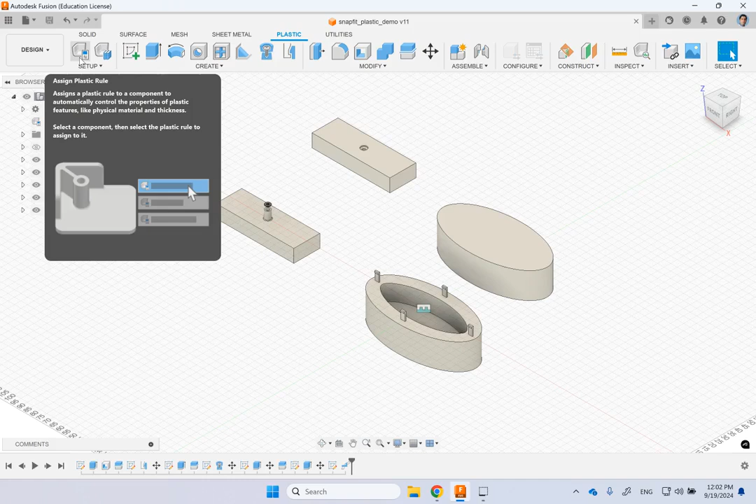This is really good for designing plastic parts like you are making them out of 3D printing. The first thing you want to set is which plastic this is from. You can say, for instance, when I want to make these parts, I want to make them out of ABS or nylon or PP or any other plastic. Let's say I want to make them out of ABS. In this design, it's already ABS, but if you want to do it from any other plastic, you can change it to nylon or anything.

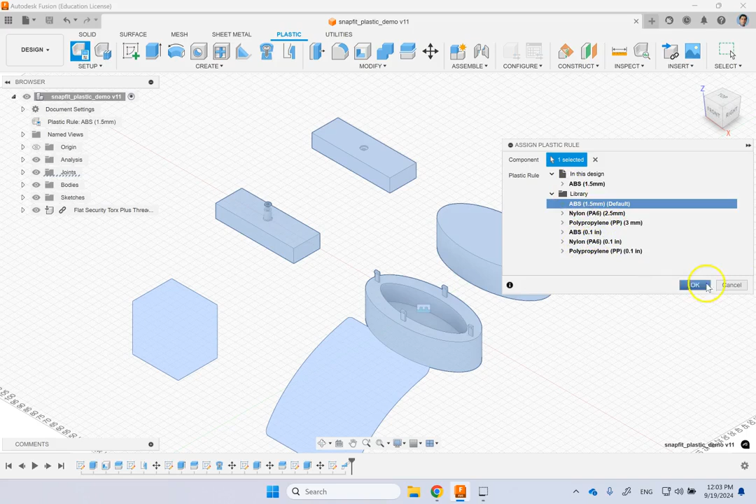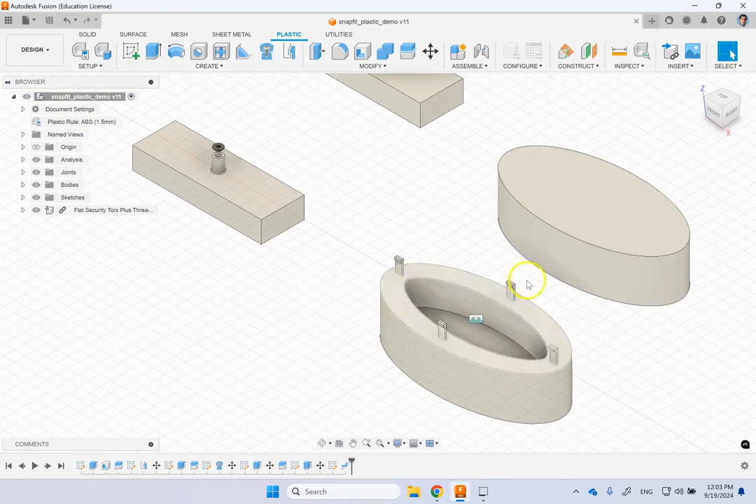Once the plastic rule is set and the plastic properties, you can go ahead and do these two options I want to explain to you. One of them is snaps, which are really good if you want to connect two parts together, these snap fits. So if you break your part into half, or you have the bottom part and the top part, left and right, then on one of them it's going to create basically these snaps, and on the other one it's going to create the snap holes.

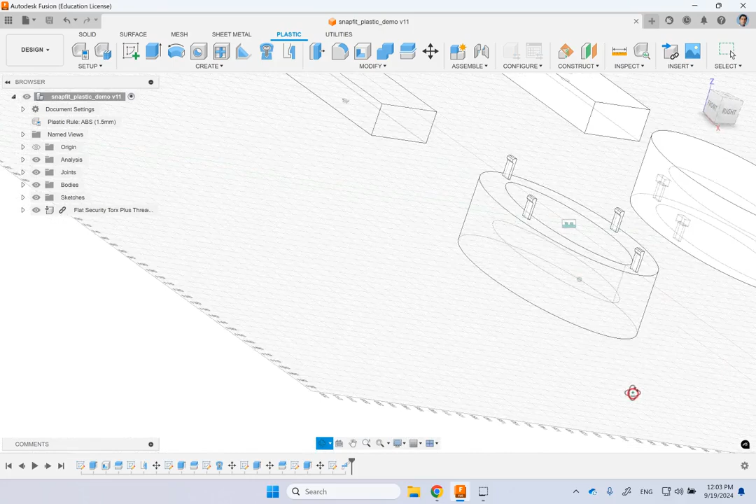Let me show you a wireframe that you can see better. So let's look here, you see these holes on these parts is where these snaps go and get locked. This is really good here, that you can create the snaps for these two parts to go together.

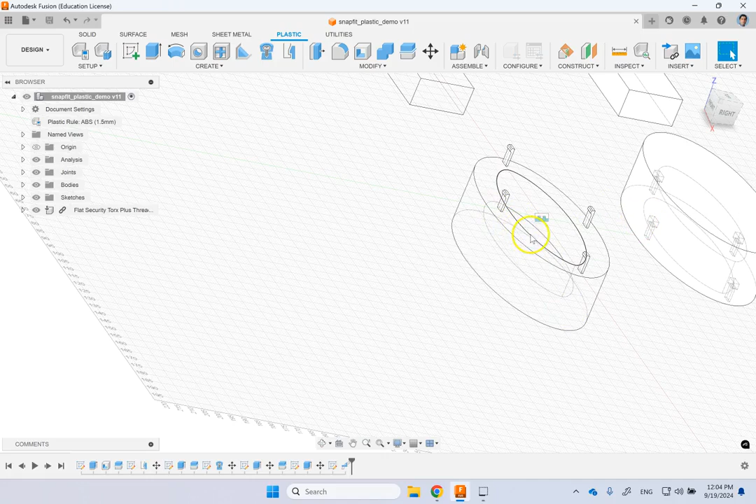Of course you have to have something for these snaps to be pushed back and get out, and that's not done right now, but you can add some holes for them so you can release those snaps back if you want to open the parts, because you don't want to break them. So that's one thing I want to show you.

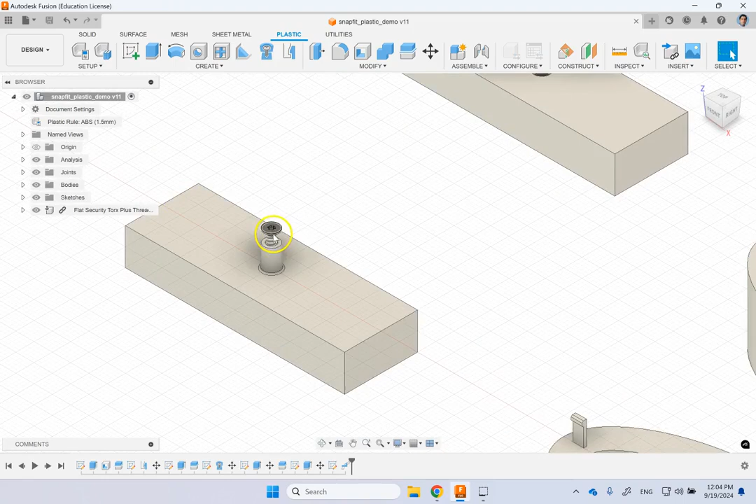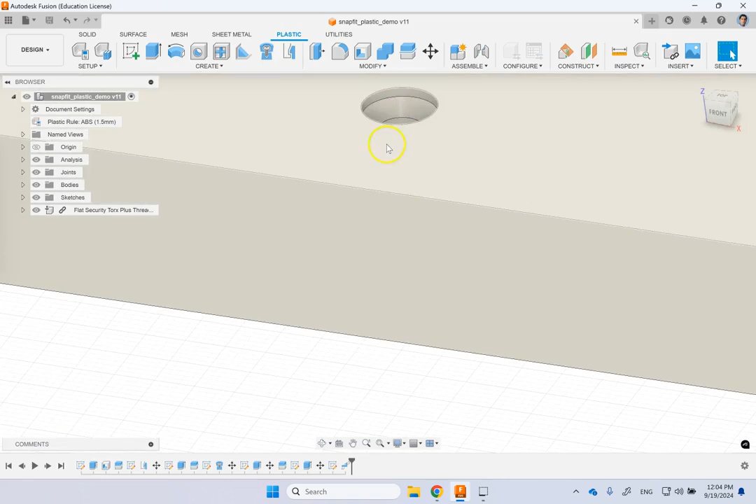The other one is if you want to attach two parts with a fastener, this screw, you can create the matching parts in these two. You can see in this one a hole is made, in this one this extrusion is made, and then the bolt is going to go through that. It's a counter sunk, it's going to go there, sit down under the surface, and then it can go all the way through the part. Let me show you how you do that.

So if I create a new one, and go to plastic, the plastic rule is already set. Remember, we already have ABS in this study. Of course, you have to create the material first, bodies first. So let's say I go to this plane, and then I use the ellipse.

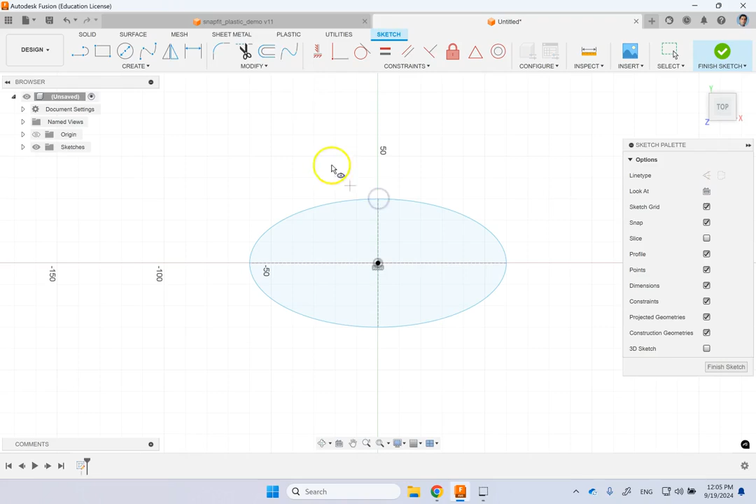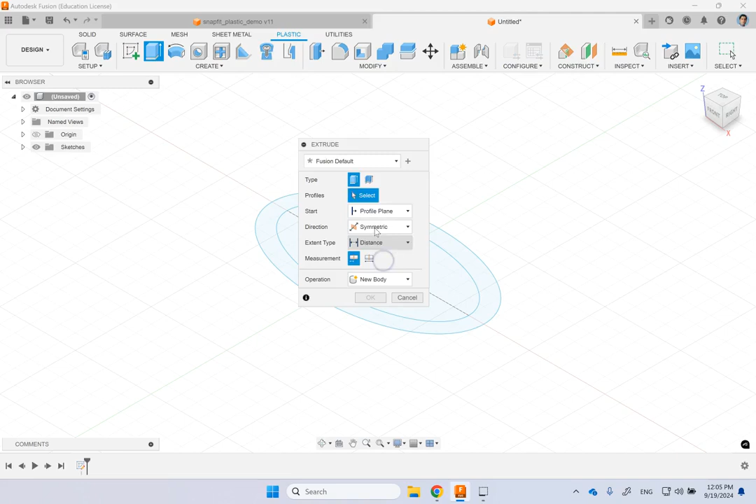Let's say something like this, for instance. Okay, and then you can offset it, and make it a little bit thicker, like this. Okay, and then get out. Then we are going to extrude it, and we're going to do symmetric, so we can use the XY plane for cutting it and splitting it later.

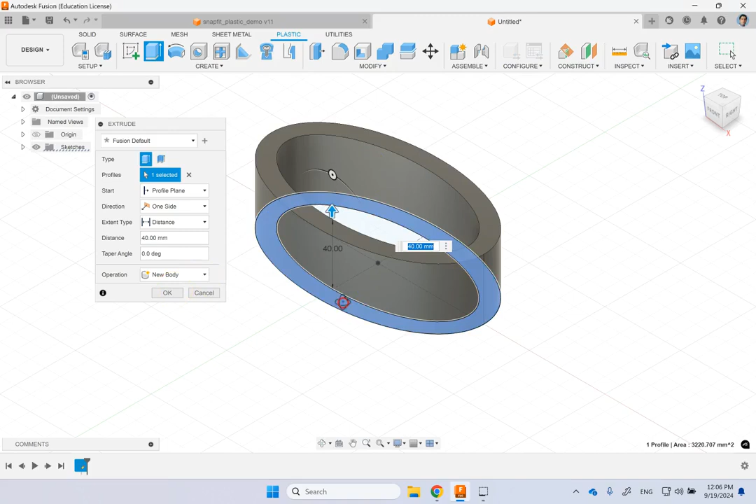So that is my profile, and I'm going to create the part. You can do that, or you can do shell if you want. So here what you do is just create a hollow part, but if you want the caps you can make it solid, but it doesn't really matter in this case. What we care about is basically the snaps, and the part does not need to have caps.

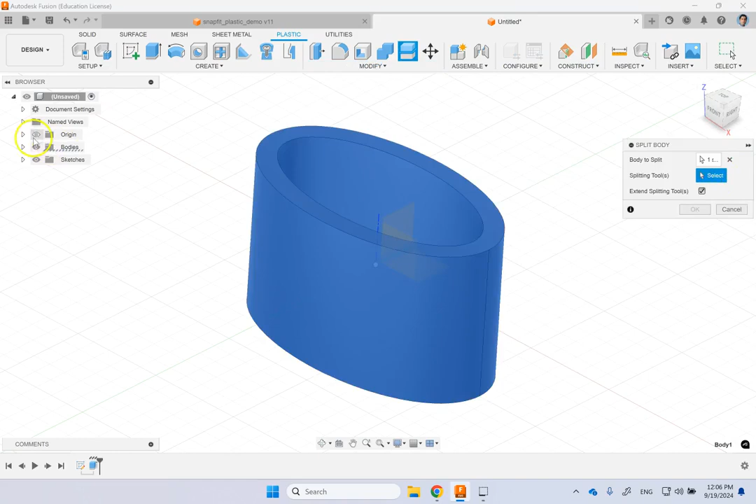So let's say you made some part like this, and now you go here and say split body, and this is the body to split, and the split tool is the XY plane, like that, and you break it into these two parts. Now, of course, you can set the plastic rule. Let's say here we're going to go with ABS and apply ABS. And now we're going to create what? Snap fits.

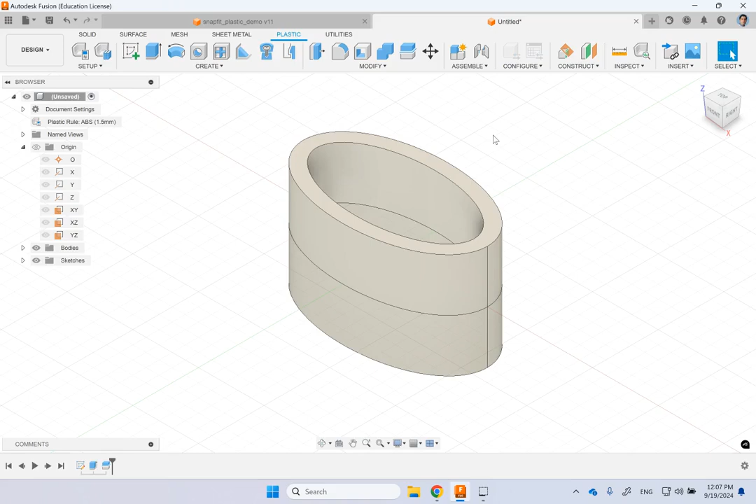Now to apply snap fits, you have to have a sketch on the points where the snaps are going to be applied. And how many do you need? 4, 2, 6, how many? Let's say in this case I just want 2, or 4, doesn't matter. So I'm going to hide this part, click on it, and use V.

Then I'm going to go on this surface and create the sketch, and use the point tool to create some points. Let's create one point here and maybe another point here. And let's use the dimension to put them at equal distance from the center. So here we go and set this to 65, and repeat the same thing for the other side. There we go.

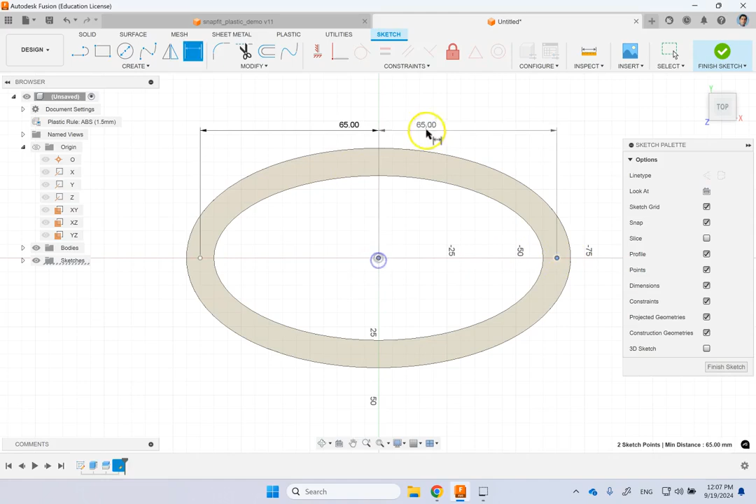And get out. Now I can go back and create those snaps. So here we click, and then it automatically picks the sketch points, you see they are selected. Then here you can provide dimensions for the size of the snaps, the profile of it, the thickness of it, and so on. These are some parameters, and you can change them.

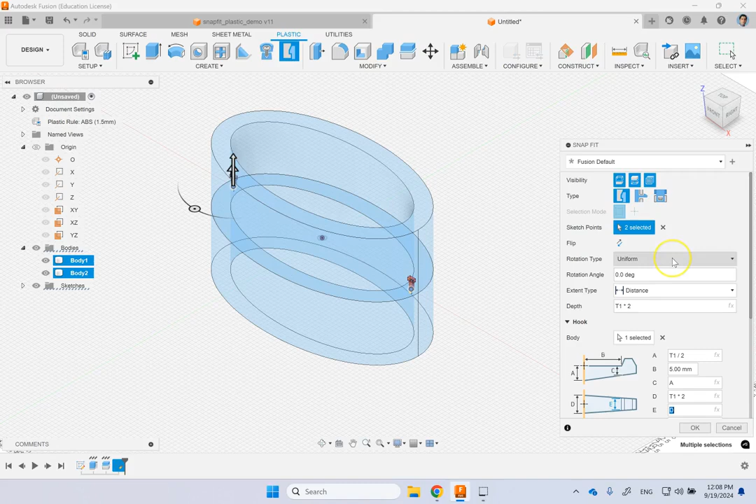And there are different types. You can do the parallel hook and groove, which is what we are making right now. You can do perpendicular, and you can do hook and loop, and there are different options here, and you can give them a rotation angle. So for instance, if you don't like them to look like that, you should be able to give them some rotation angle like this, correct? And then again the depth of them, everything you can change.

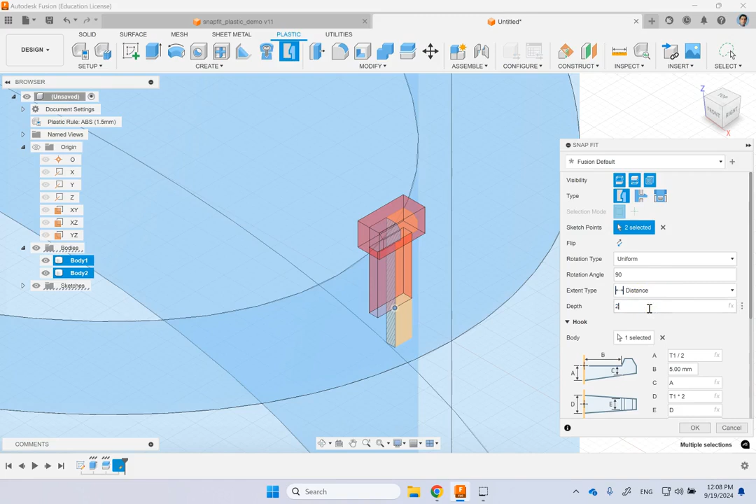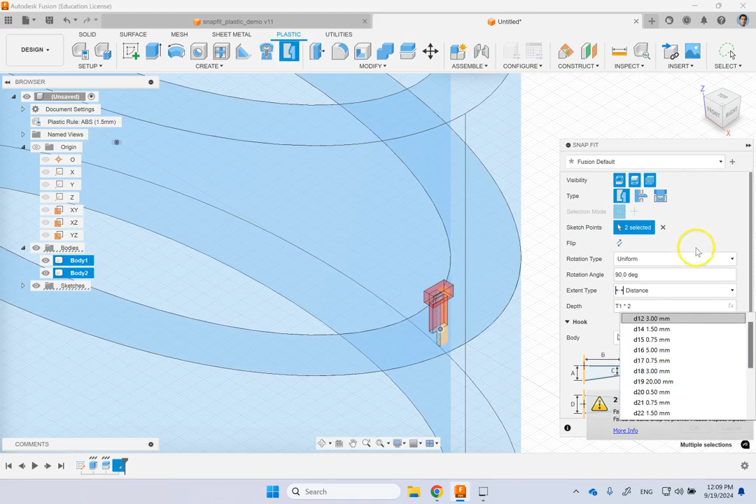So here you see T1/2. Let's say in this case if I say 2, let's see what happens. You can override that and type it. So you see it's the depth of this hole, and that's not what you want. So this thickness E is probably something you want to change. Let's see, that's probably too thick here, too thick. Let's try 6, something like that, or again you can go back to use the formula. Okay, and if you're done, go ahead and OK that.

So now if I use my move tool and grab this guy and move it, you can see that the snaps are created for this, and then the holes should be created for this one. Okay, so this is the snap tool.

And then similarly, you can also create solid parts and apply basically a bolt on them, which in this case the name of the command is called boss. That is basically using a fastener to attach the parts together and creating the extrusion inside the part to make it happen.

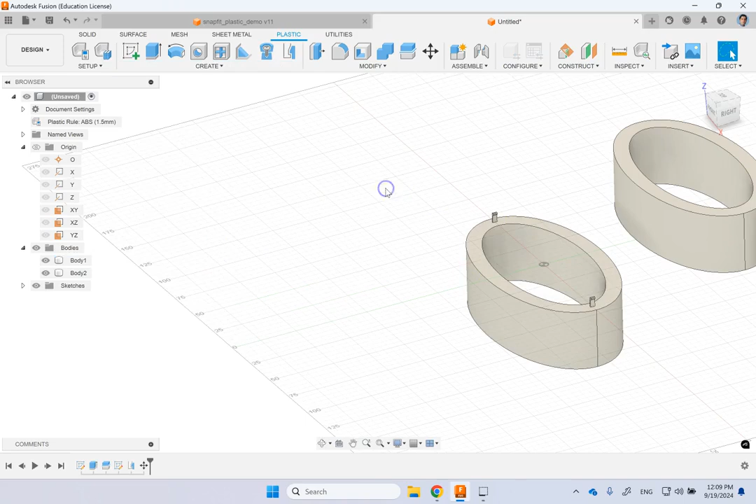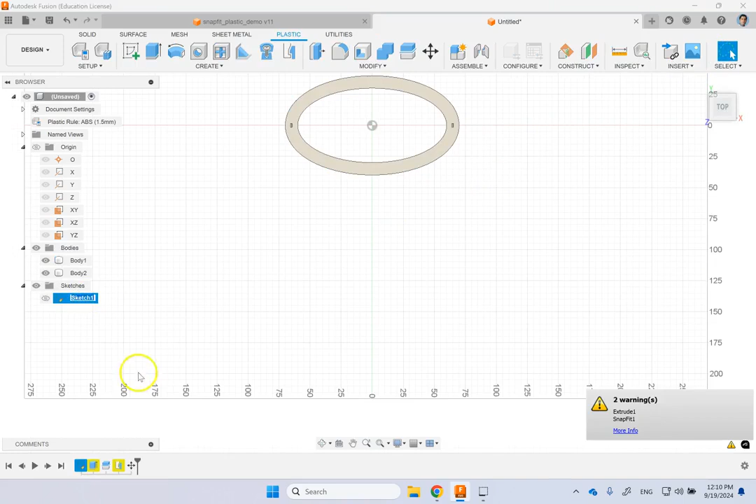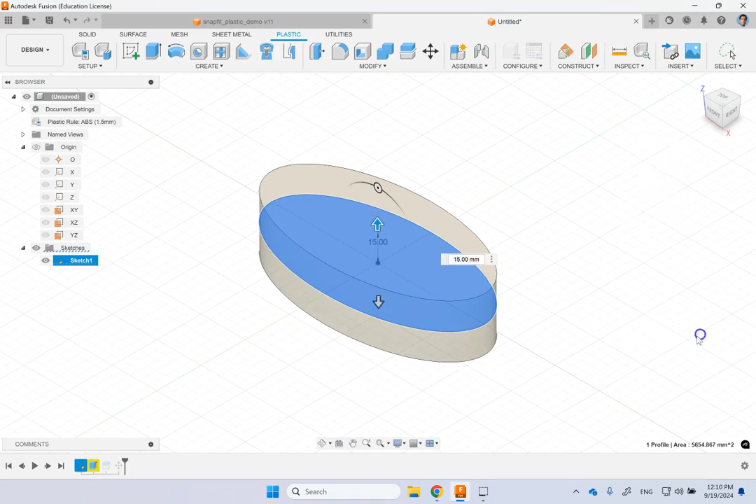So to show you that one, maybe I go back and change my sketch. In this case I do not need this sketch, so I'm just going to delete it. And then for this sketch, I'm going to go back and make it just the ellipse. And go back here. One thing is, when you change the sketch, it doesn't necessarily mean you change the part, you have to go back and change the part. So I go back here and edit feature and pick this one, and let's make it a little bit less thick, maybe 10 mil each or 20 mil each or something like that. Okay, and I also get rid of this portion.

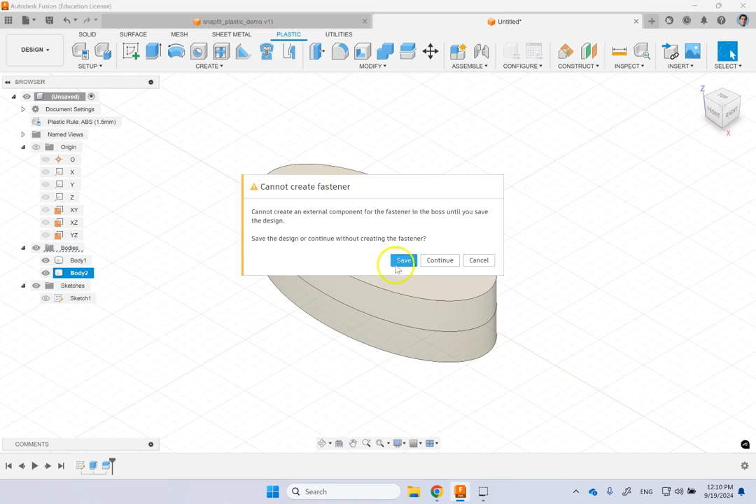So here I have these two pieces together, and I want to create a path for the bolts to connect them together. So when you click on it, you see it says cannot do it. Why? Until you save the design. So first save it, just call it demo. And then when you click on this, it asks for a single point, which is where the hole should be made. You just need one sketch here, a single point actually.

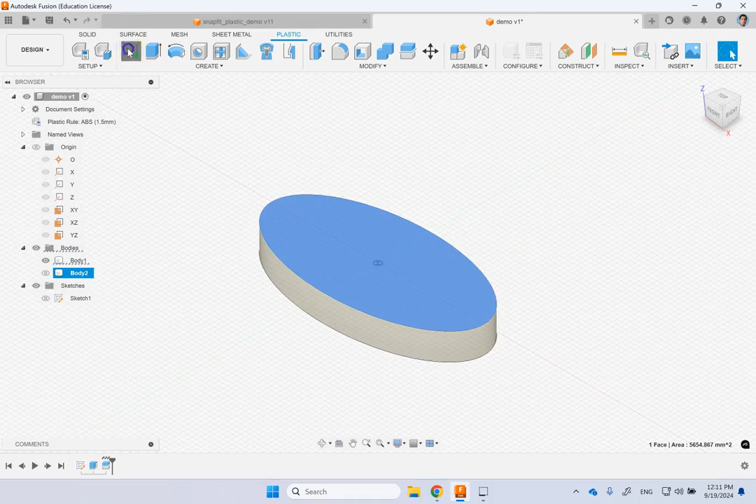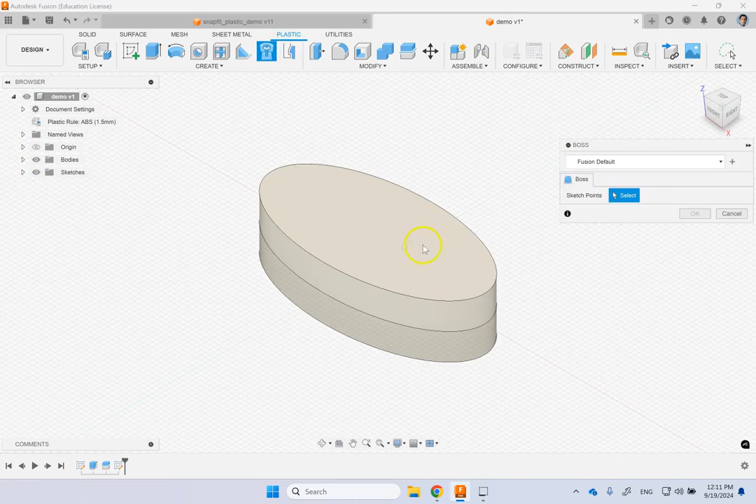So here I go on this surface and start the sketch, use the point tool and put it right at the center. Or if you don't want it at the center, let's say I want it here for instance. Okay, I put it there, get out, and let's put this part back. So now we're going to go and create the boss. That is the point, and it should create a preview of the hole of the part, right?

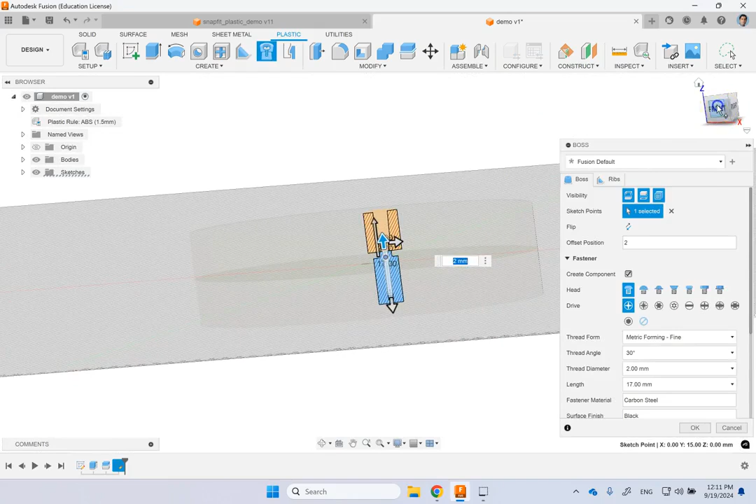And if you want to create offset, you can do that. For instance, if I do a 2mm offset, you see that's the offset. Let me see if we can look at the front view. Okay, right, let's make this 2.5 so you can see better. So that's basically how far this part comes into the other one, this extrusion that you make in the part.

Okay, so if you don't want it, put it back to 0, and then you can create components here, of course. There are all sorts of heads. So the one I made was a flat counterbored head. If you want, you can make anything else.

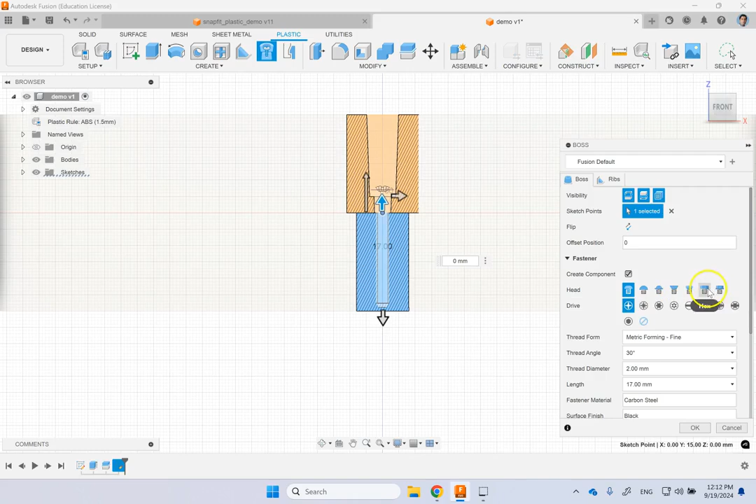Let's say I want the hex head. And then for the drive of it, I want to use a Torx Plus, or I want a Phillips, or I want a flat, or anything. Let's say I use a Phillips. And then there are all sorts of other parameters for the thread angle, whether it's a metric or inch system, fine thread or coarse thread.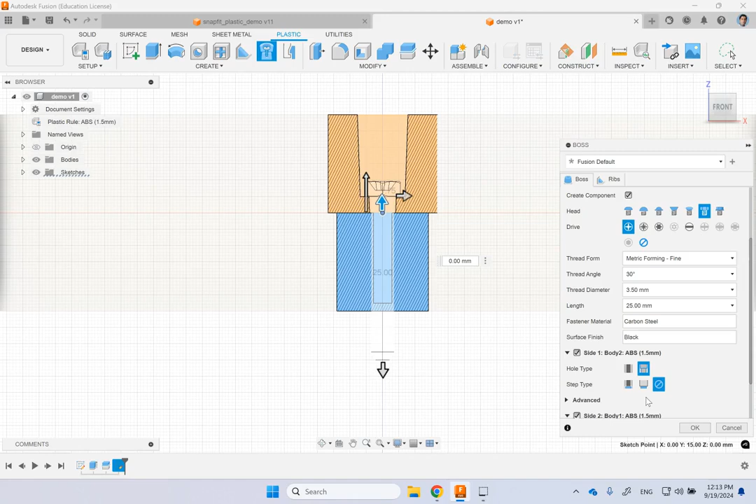There are all sorts of things you can do. And what is the fastener material? Because it will not only create the hole and features for the two parts, it will also add a fastener. So you can see the preview of the fastener here, and this is the length of it. Let's say, for instance, if I make it a little bit longer, it can do that as well.

And you see here, these are the directions of extrusion. Here I reversed it. As you saw, there are lots and lots of options for you to pick here, right?

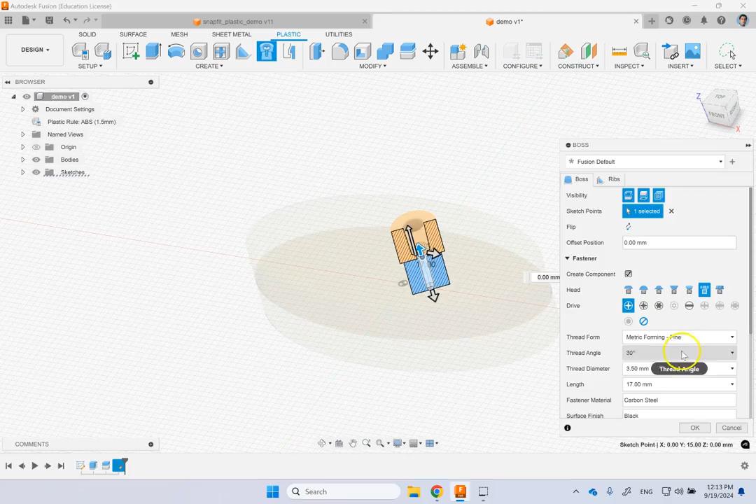So let's see, then there is thread diameter. You can make it bigger. And here, the hole type — do you want it counterbored or simple? Let's say I want it counterbored. And then do you want any step in it? No.

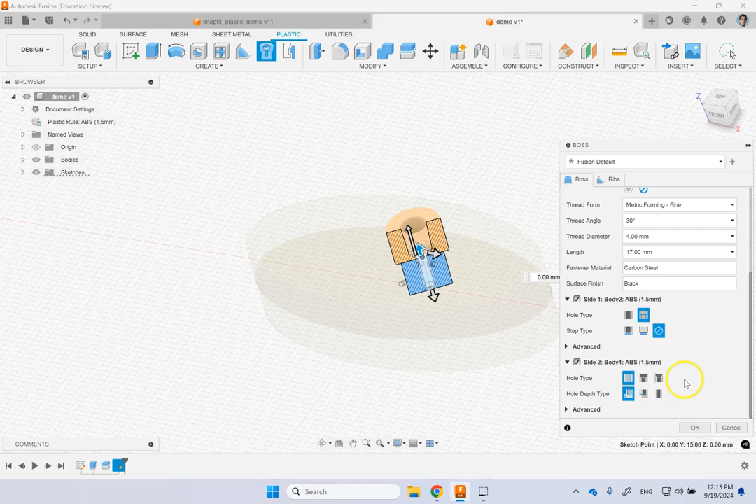And then for side 2 — there is side 1 and side 2 — what do you want again? Let's do something similar. And then there is hole depth type, and then there are advanced options here.

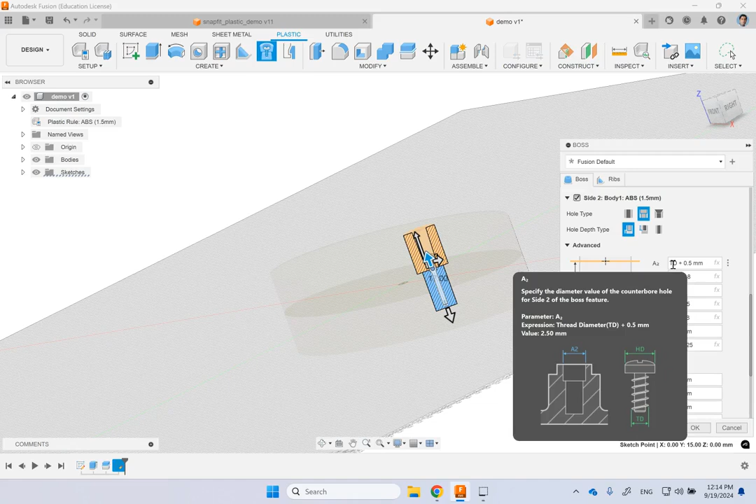Okay, and here you can provide lots of different information, like how much is each part here. So you see, for instance, if you look at I or J, you see they are all related — related to the thickness of the material. So you can see these parameters, it's a parametric hole, and the parameters are based on the thickness of the material that you're picking.

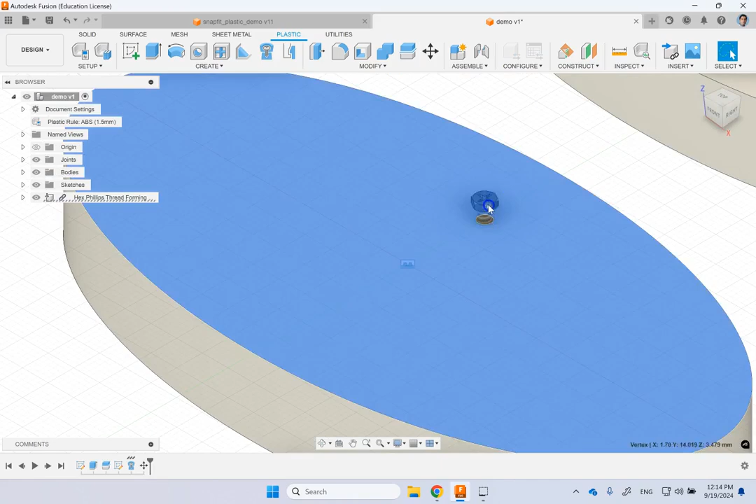And if you okay that, now let's go back here, and let's move these parts. Grab this and move it out of the way. You can see that here this part is made, the fastener is made, and the fastener is added here. You can see this is the body of the fastener. Let's hide it for a second.

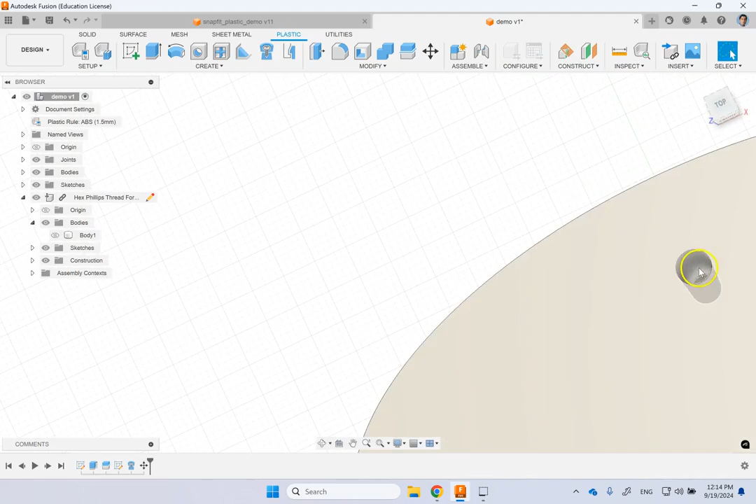So you see in this part a threaded hole is made, and if you look at the other one, you can see again a hole is made in that, and then here is the recess and a location for the counterbored head.

So you see these two are very good for attaching plastic parts together, either using a fastener or just using a snap. And there are these two other options, but these are not necessarily for attaching. One of them is a groove, basically so that one part can slide on the other, and the other one is if one part is going to sit against another, you can use a rest.

Okay, so if you have, for instance, a cell phone charger, and the cell phone is sitting on it vertically, here you can have the sketch of the profile of the cell phone, and then you're going to project it onto the surface of the cell phone holder, and it's going to create a resting place for it so it can sit on that.

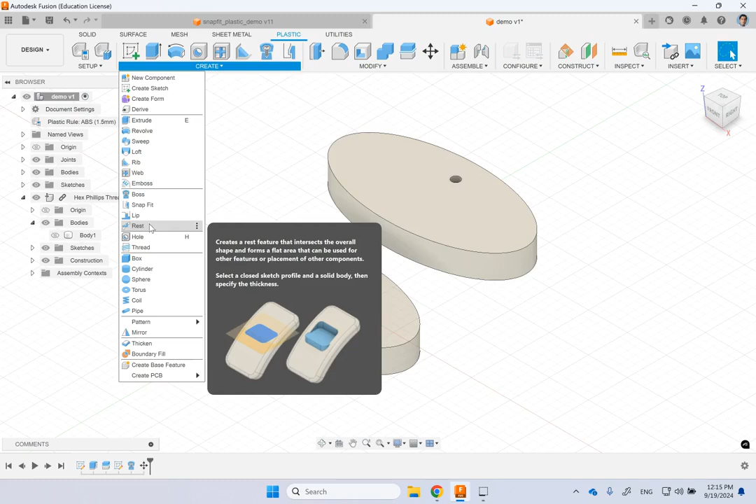So you have this, and again, this lip is good when one object is sliding against another one — it's a lip groove. But here, my goal was connecting plastic objects together.